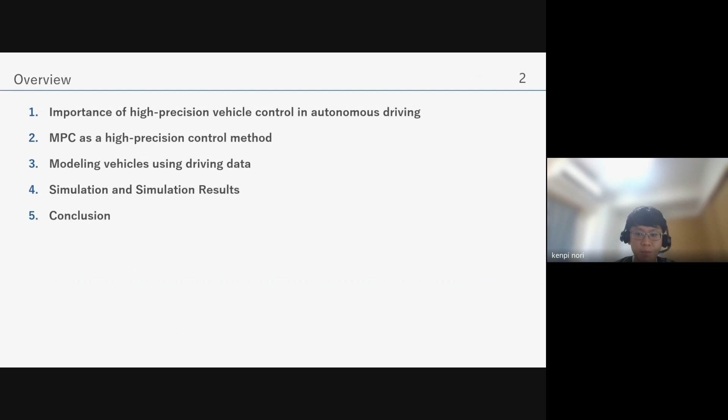Let's take a look at the agenda for today's presentation. First, we'll explain the importance of high-precision vehicle control in autonomous driving. Next, we'll look at MPC, or model predictive control, as a high-precision control method. After that, we'll examine modeling vehicles using driving data. Then we will go through simulation and simulation results. Finally, we will wrap up with the conclusion, where I will summarize our key points.

First, let me explain the importance of precise vehicle control. High precision vehicle control is important with respect to 3 points: safety, traffic rules, and comfort. Autonomous vehicles need to coexist safely with other vehicles, pedestrians, and bicycles without coming into contact with them.

They must also obey the same traffic rules as other vehicles. To operate autonomous vehicles in compliance with established stop lines and speed limits, they need to follow the planned trajectory closely. And for the comfort of the passengers, the vehicle must not vibrate significantly against the reference trajectory.

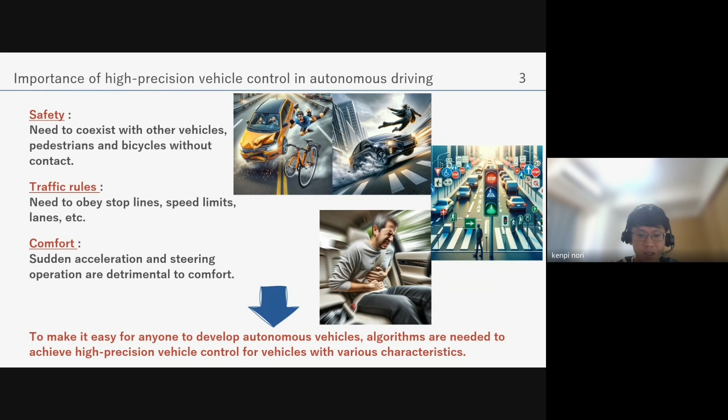To make it easy for anyone to develop autonomous vehicles, algorithms are needed to achieve high precision vehicle control for vehicles with various characteristics. In this case, I focused on MPC to achieve highly accurate vehicle control. MPC optimizes control inputs based on mathematical models that predict the future state of the system.

Based on the predicted future state, an optimization problem is solved to compute the control inputs that will minimize the target trajectory tracking error. Only the first control input in the calculated control input profile is then input to the control system. By repeating this process each time, control with a small tracking error can be achieved.

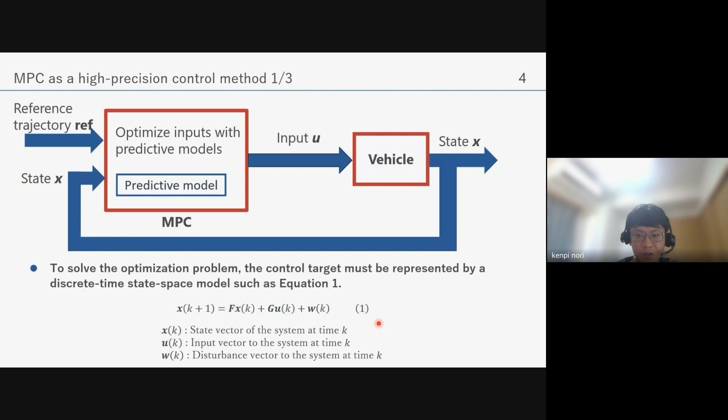To perform MPC, a predictive model of the control system is required. The predictive model requires that the system be represented by a discrete time state space model as in equation 1.

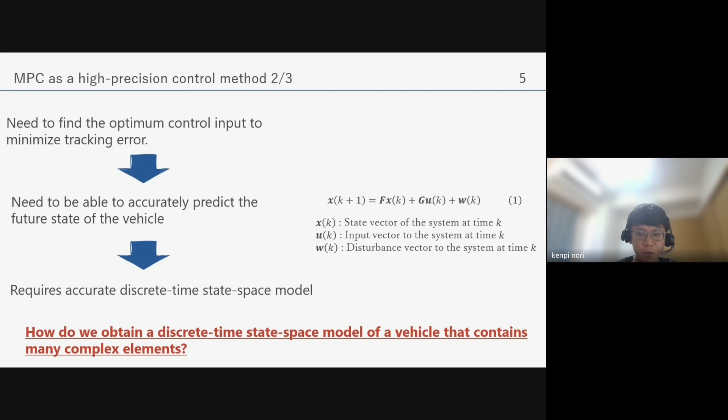From the explanation of MPC on the previous slide, we can see this. In order to find the optimal control input that minimizes the tracking error, it is necessary to be able to accurately predict the future state of the vehicle. To accurately predict the future state of the vehicle, an accurate discrete time state space model of the vehicle is required. In the following section, I will explain the method used by MPC implemented in Autoware and the method I propose to obtain it from driving data.

Autoware approximates the vehicle model to a bicycle model, as shown in figure 1, to derive a discrete time state space model. Autoware offers a choice of 3 different models, but we will discuss the bicycle kinematics model without the steering delay, because the simulation model we have prepared does not have a steering input delay.

Assuming that the vehicle is approximated as a vehicle with only 2 wheels, as shown in figure 1, that the vehicle's heading does not deviate significantly from the target heading, and that the steering angle is minute, the lateral motion of the vehicle can be represented as a discrete time state space model as in equation 2.

MPC using this bicycle model as a predictive model will be compared with the MPC proposed in the following section as the MPC implemented in Autoware.

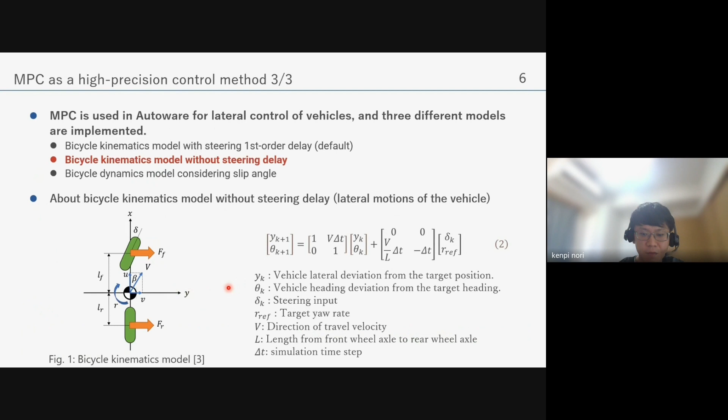However, there are several factors that are not taken into account in the bicycle model. This includes the motion of a vehicle with three or more wheels, pedal lag, a time constant, dead zones, black box software intervention, tire stiffness, and so on.

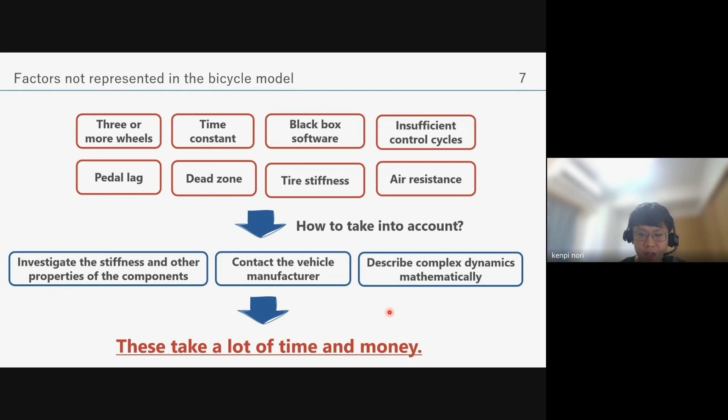To rigorously take this into account, one would need to measure the stiffness of the components, contact the vehicle manufacturer and ask them to tell us what is in the black box, and so on. But doing these things and building up a mathematical model takes a lot of time and money.

Therefore, I propose to use driving data to identify the vehicle system and build a discrete time state space model. Modeling vehicles using driving data has the potential to provide fast and accurate modeling for vehicles with various characteristics. Here, I explain how to model a vehicle using driving data.

First, a time series of driving data is prepared. Driving data includes inputs such as steering angle and acceleration at each time point, and states such as position and posture. The output model for the input is the ARX model, and parameter estimation is performed using the least squares method.

The ARX model assumes that the output at a given point in time depends on past output values and past inputs. In general, the ARX model is expressed in equation 3. In this case, the order is set to 1 for simplicity. The ARX model can be transformed to a discrete time state space model by obtaining the parameters. In this way, a discrete time state space model of a vehicle can be constructed from driving data.

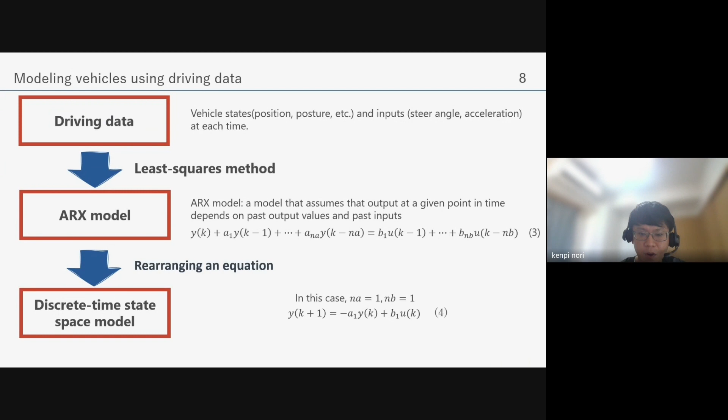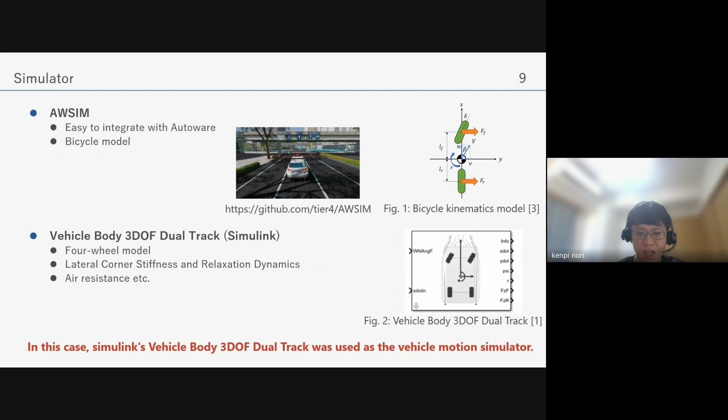In this case, the Vehicle Body 3DOF Dual Track was used. Vehicle Body 3DOF Dual Track can consider a four-wheel model, lateral cornering stiffness and relaxation dynamics, air resistance, and so on. It can also be used in simulating a block diagram environment for model-based design. This is a block diagram of Simulink for obtaining driving data using Vehicle Body 3DOF Dual Track. It is used in the center of the block diagram. The left dial controls the steering angle, and the bottom right saves the state and input at each time.

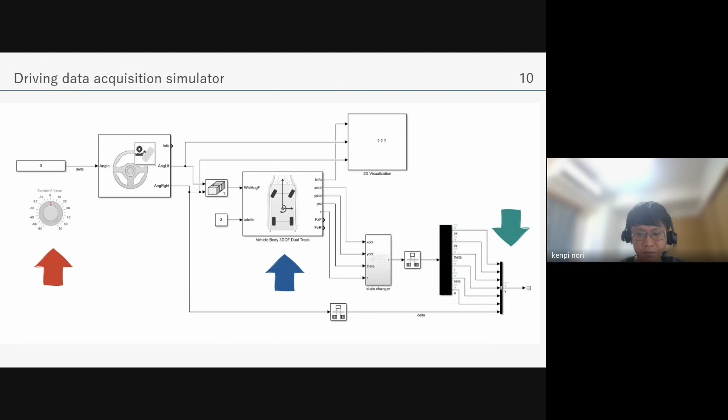The main simulation parameters are described in table 1. The driving data used for the system identification was for 110 seconds every 0.1 second. The vehicle model used is the same as the parameters used for a normal passenger car. There are many other simulation parameters, but they cannot be presented here, so we refer you to the Simulink model.

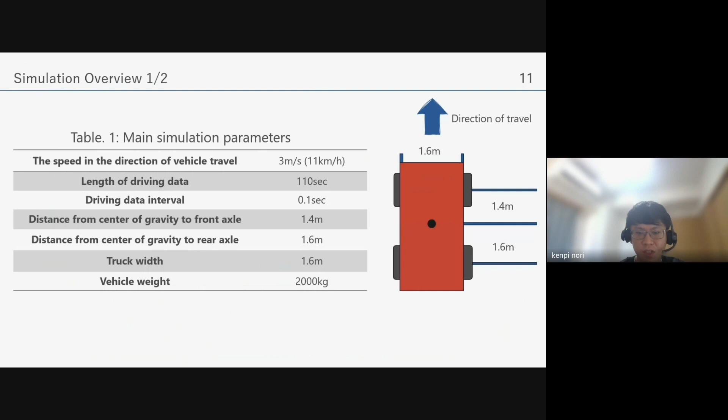Since the longitudinal and lateral motion of the vehicle are considered separately in this study, coordinate transformations are required sequentially so that the x-axis is always in the direction of the vehicle's travel. The 110-second driving dataset was cut into 1 second segments, and the coordinates were transformed with respect to the posture of the first driving data in each driving dataset. Finally, 110 driving datasets containing 10 driving data were created. Using this dataset, parameter estimation was performed on the ARX model to construct a discrete time state space model.

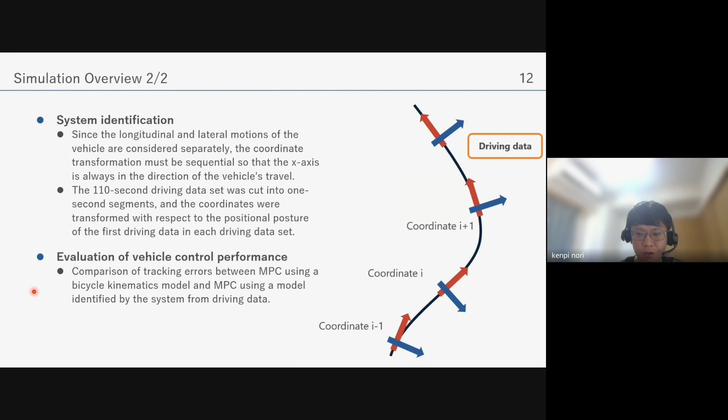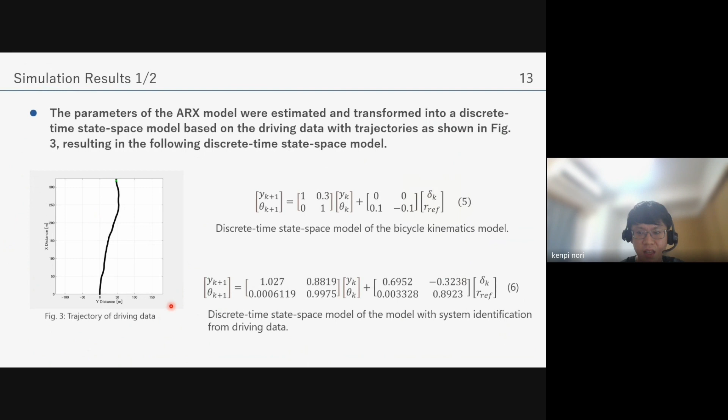The MPC using the bicycle model and the MPC using the model identified from the driving data were used to perform trajectory tracking control, and the trajectory tracking errors were compared. The parameters of the ARX model were estimated from the driving data with the trajectory shown in figure 3 and transformed into a discrete time state space model. The discrete time state space model with the bicycle model is as shown in equation 5, whereas that of the vehicle system identified from the driving data is as in equation 6. And we will compare the magnitude of the error in trajectory tracking using MPC with the bicycle model and MPC with the model identified by driving data, respectively.

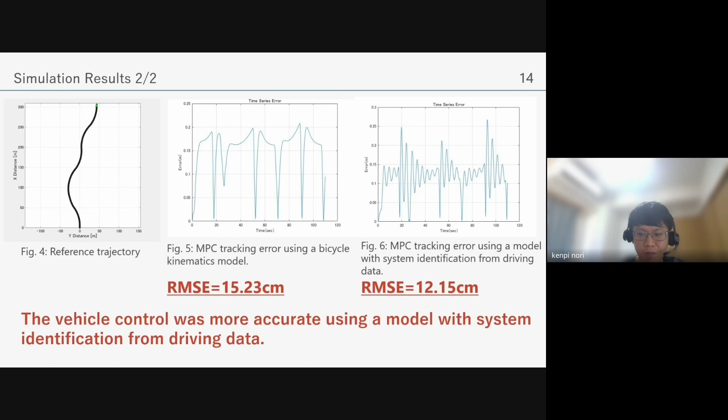The reference trajectory used in this study is the one shown in figure 4. Figure 5 and figure 6 show the tracking error using a bicycle model and the model identified by driving data. The RMSE of MPC using the bicycle model was about 15 centimeters, and the RMSE of MPC using the model identified by driving data was 12 centimeters. Therefore, on the evaluation axis of RMSE, the MPC using the model identified by the system from driving data was superior.